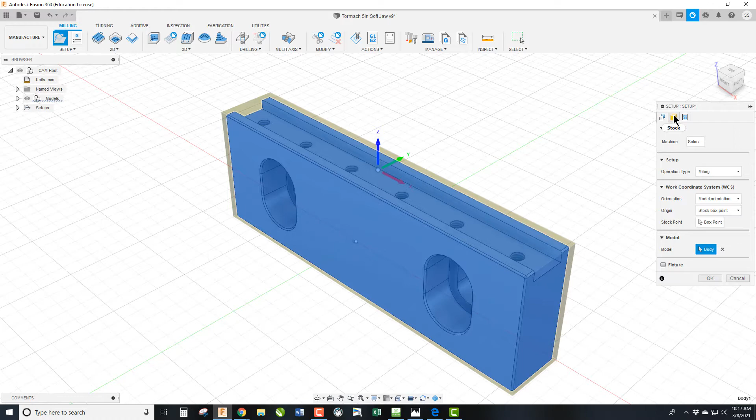But we're also going to make this a from solid and select the solid because we've already machined this in Ops 1 and 2. I've noticed that for some reason in the latest update, Fusion has lost that I live in America and have to use the inch system, so I'm going to set that back to inches.

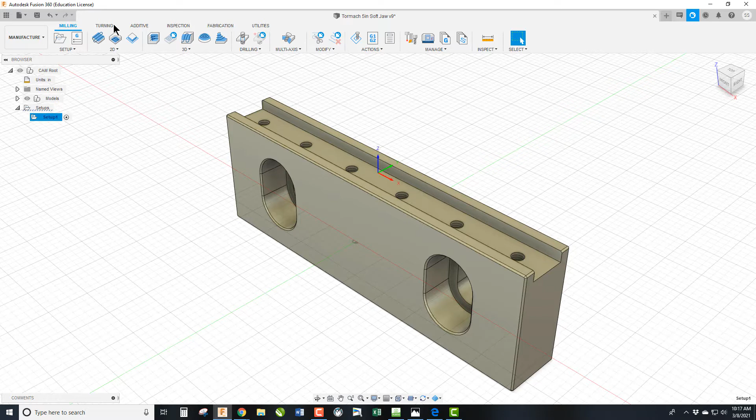So first thing we're going to do is we're going to adaptive clear this. We probably could just blow through with a 3/8 end mill and get what we want, but I'm going to show you guys a cleaner way of doing it.

So I'm going to select for my tool libraries the standard Haas library that we use, where the number 4 tool bit, or the number 4 drill bit, is a 1/4 inch end mill. We're going to grab that edge, and we are going to reduce this.

I'm happier with it. Seems to run better on my machines at 0.8, and I'm going to leave it. And there we go, it did an adaptive and cleaned up most of that.

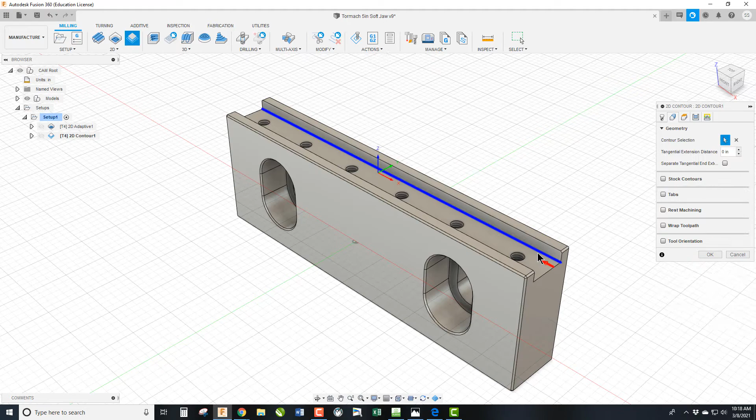So the next step is we are going to do a contour of this line and that line with a 3/8 end mill. And why do I choose 3/8?

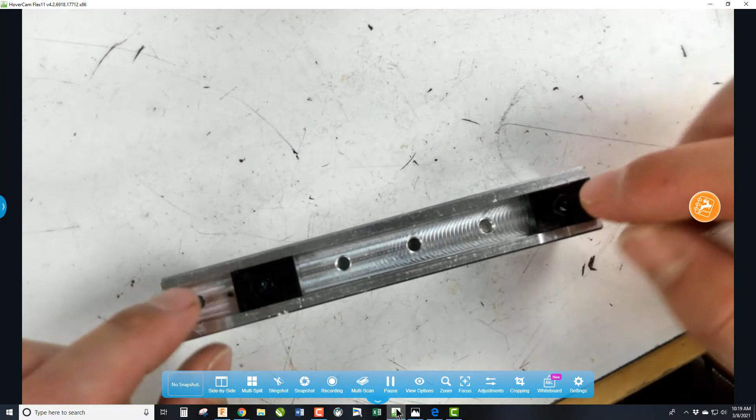So let's first hop over to the desktop and let's take a look at the part. So here is our Talon grip soft jaw. And these Talon grips have to fit in this groove.

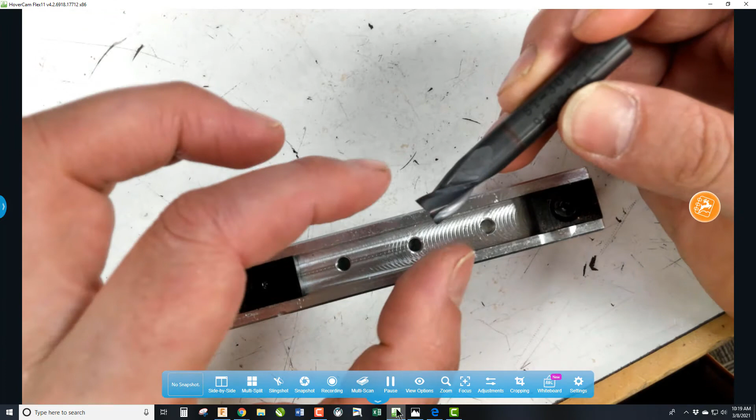Now, if we take a standard 3/8 cutter, which here's the 3/8 cutter, and we run this in here, the computer is calculating that this is 0.38 of an inch in diameter, which it should be within tolerance. It is probably not exactly 3/8. It could be over, but more likely it's slightly under, like instead of going 0.375, it may be 0.3745. But anyways, that small variance, especially when you add it to both sides, could make our groove too narrow.

So the way to cleanly do this is we're going to use wear, which lets us calculate this as a 3/8 cutter, but then when we cut it and try to fit this in and it doesn't fit, we can go in and adjust the wear, which will allow the computer to say, oh, the cutter's actually slightly smaller. I need to shift the tool path slightly to the right or to the left, depending on which way you're cutting, and cut again to get to the exact size they want.

So it's basically a way of telling the computer that the cutter is slightly undersized, and we want you to take that slightly undersized into adjustment.

It also allows us, if we program a perfect 0.5 width, and these are not exactly 0.5, they're slightly bigger, we could just, with a couple of keystrokes at the controller, open this up without having to go back, adjust the CAD file, repost a file, go out, run it, find out it's still too small, and then go back.

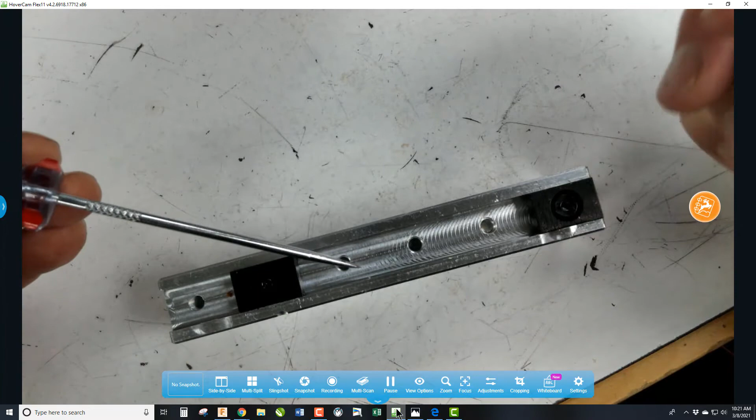We've chosen a 3/8 cutter for this project because this is 0.5, and if we accounted for the wear and shift the cutter over for this pass, it can leave a little ridge behind that then we'd have to go back and clean up. If we just switch to a 3/8 cutter, which is a tool standardly loaded in our machines, we can ensure that we cut on both sides.

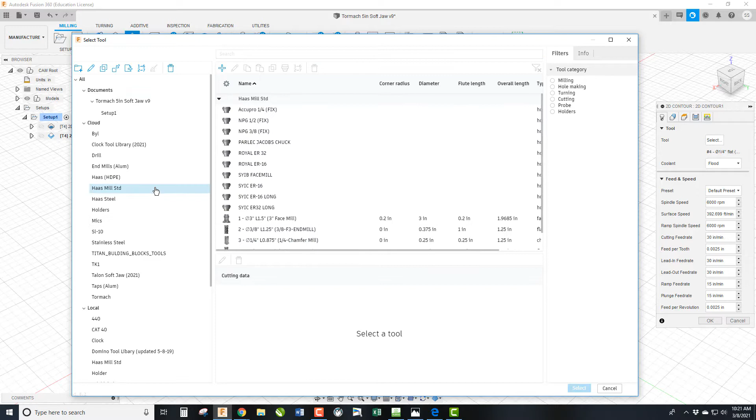Even when we add wear, it's going to not leave a ridge. So back in the model, we're going to choose a 3/8 end mill out of our standard tool library, which is our tool number 2. We've selected the geometry, the height doesn't change. We need to change from compensation type to computer to using wear, and then we should be able to click OK.

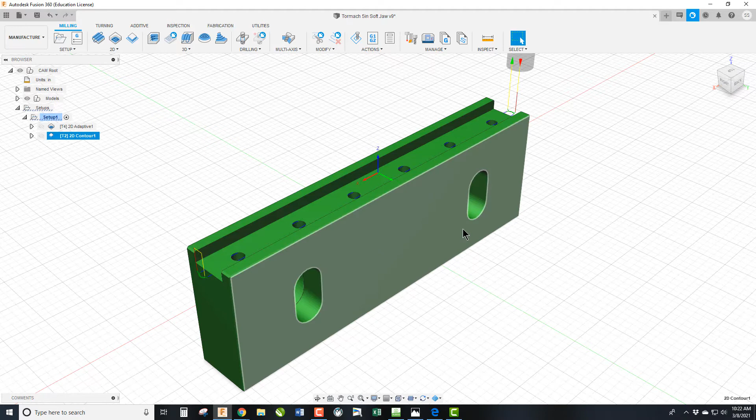Now, in the computer, it's going to show us nothing—we're not going to see the wear. Oops, I'm sorry, I was trying to simulate that. If we hit play, there we go. Let's speed this up.

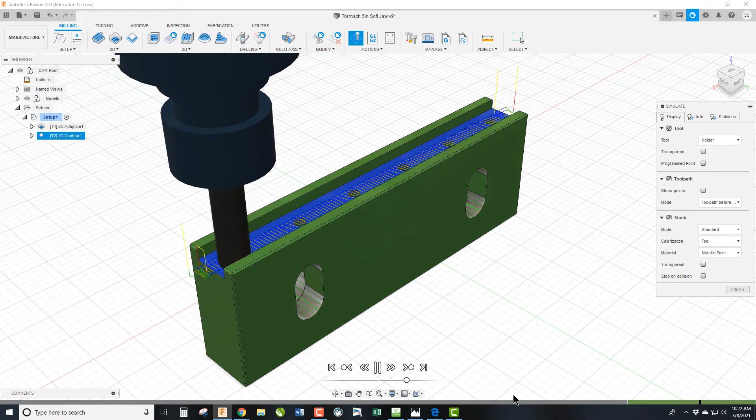It's going to come back and clean up that edge and come back and clean up this edge. The computer knows that it's a 3/8 inch cutter and it doesn't have theoretical wear in it, so it won't adjust for it. Now, in real life, we're going to cut the first one, then figure out how much wear, type it in, and then we can make hundreds of these before we'd need to adjust that.

Considering in the student environment that you're in, you're only making one. You're going to cut it, probably undersize, and then make the adjustment and have to recut this contour probably twice.

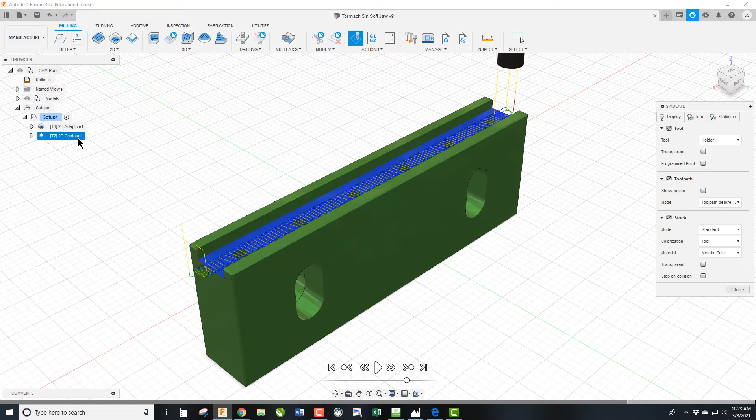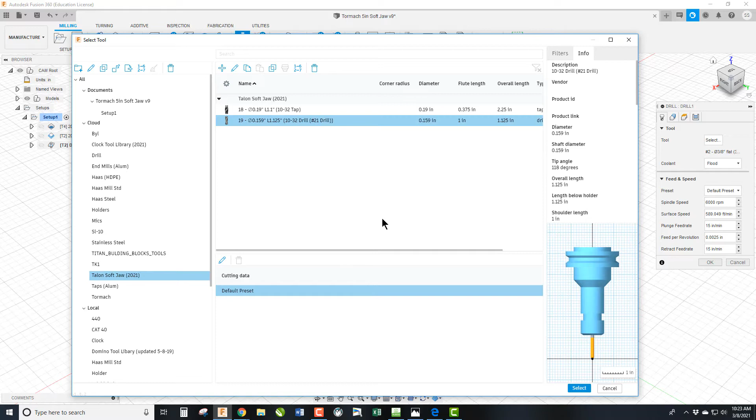So now that we have that done, the next thing to do is to come back and drill these holes. We're going to go ahead and switch to the drill, and we are going to select from the tool library the Talon soft jaws, and select drill 19. You download this drill library from Schoology. And we then select here—I can select the same face so it'll grab each one.

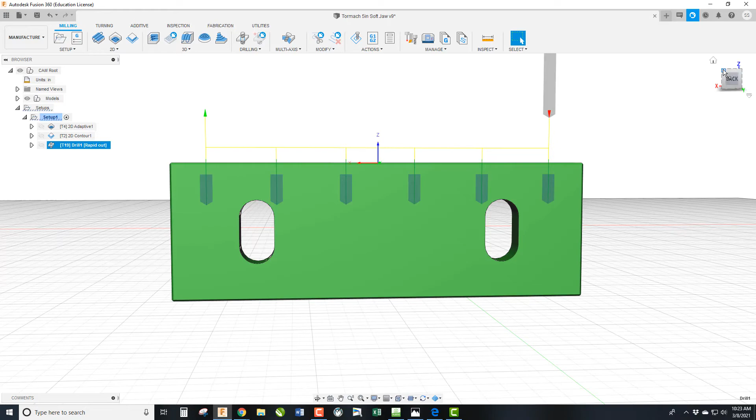I'm actually going to push the hole a little bit deeper, like 0.05 deeper—oops, that's negative 0.05 deeper. Now the reason why I did that is so when I cut the tap, there is space at the bottom of that hole, so I'm not running that tap to the bottom of the hole, risking it breaking off.

The reason why my talons are offset by 1 is because that's what happened on the hole on the other set of talons that I have in the machine right now—they broke a tap off in this hole, and we can't get it out. So we offset this in by 1, and the block is slightly offset in the jaws. Not perfect, I probably should move this one in 1. It would be better.

So now it's time to tap. We select drill again, and we're going to select the tapping tool from the same tool library.

We are then going to select one, select all of them, and we are going to stop this 0.025 up from the bottom, which we are using a 1/2 inch bolt going in here to hold these on. The talons are 1/4 inch thick. We've made the hole 0.35 deep, so we're only going down 0.325, so there should be plenty of room for the bolt length in there.

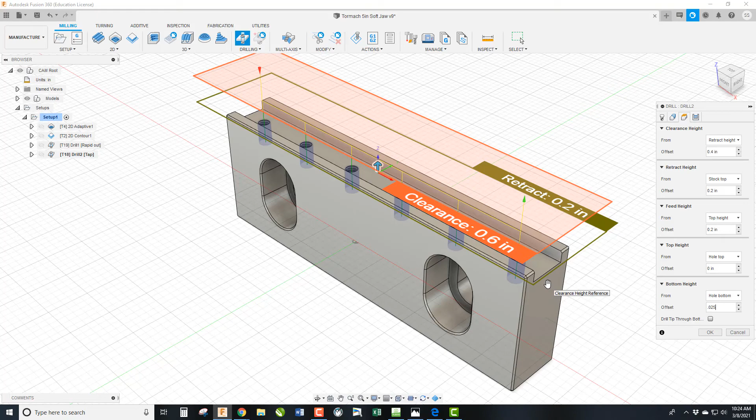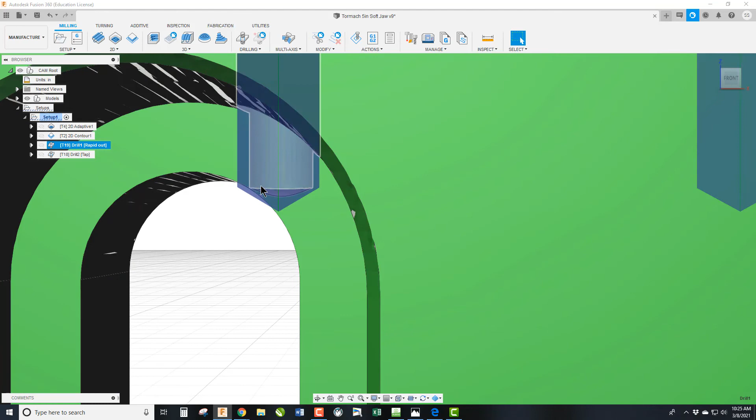So we can go ahead and click OK. And if we turn it to the front and switch between here and here, you can see there's clearly a difference between the two. That extra 0.05 has gotten me all the way past the bottom of the hole because remember, it's controlled off the tip.

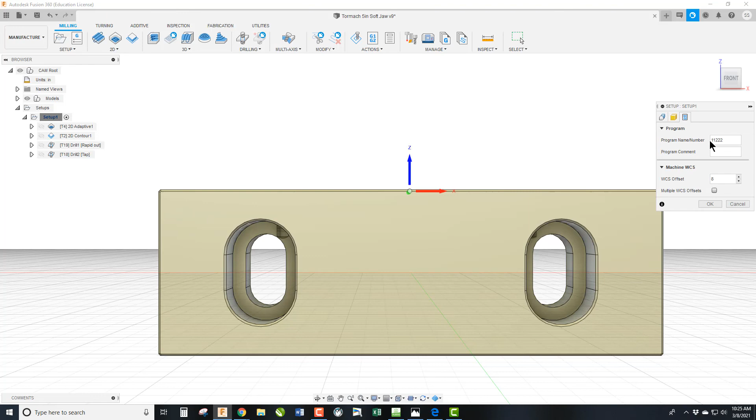So we click OK, we post it out. Oops, I named it the wrong thing, but we'll just post it to the download so I can throw it away later.

And here's our code. We'd run it on the simulator before we go out and run it on the Mini Mill 2. Hopefully you learned something. Thanks for watching, we'll catch you in the next one.